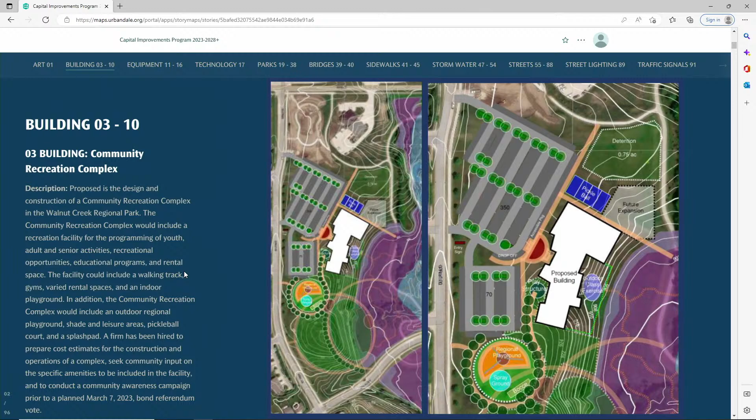This is proposed for a March 2023 bond referendum. We've been working with a number of community forums, two scientifically valid surveys, and significant community input. It's looking favorable that there's community support, but we'll know that for sure on March 7th.

But here before you tonight are the preliminary design sketches. The firm will be presenting more concrete preliminary design plans at the Park and Rec Commission meeting on December 7th, and then to the City Council on December 13th.

I certainly, if you've followed this, and I think most of you have, in regards to the need for this type of facility, the support of this type of facility, this will be going in January, where the council will make the decision in regards to the wording on the question on the bond referendum, and then we go forward with that.

Right now the funding here is estimated at $43 million, which would include indoor gyms, indoor walking track, indoor playground, indoor meeting space, as well as programming space, outdoor splash pad, outdoor playground, and outdoor pickleball and tennis. A unique facility for Urbandale, with unique amenities, and it would be located in the Walnut Creek Regional Park.

This is where the fire station is located. This is Meredith, this is 152nd. So this is the proposed location. Happy to answer any questions on that project.

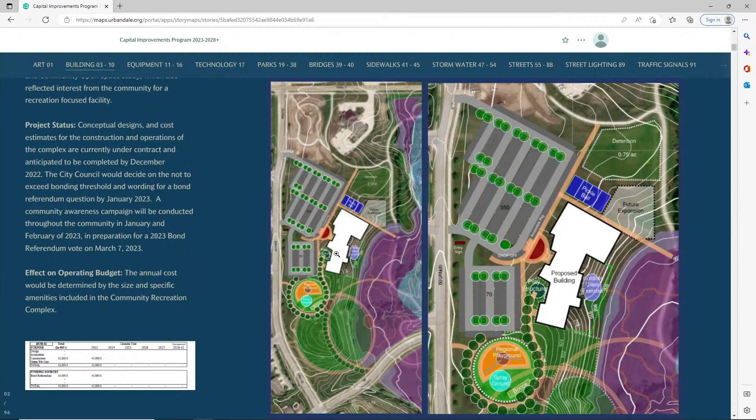Next item is upgrades to our training building that we have at 121st Street. All the items have already been purchased, we're just waiting to schedule for installation. So that's an ongoing process that should be wrapped up in the next 4 months.

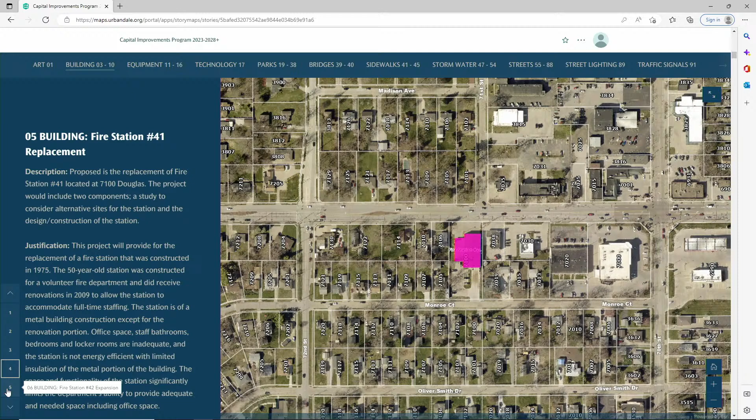Did you have a question as well, sir? No, I did not. Thank you.

Chief, one quick question. What's the lead time on the water tender truck? Is it the same 24 months? Well, right now, everything seems to be, that's the answer, it's 24 months. I know it, and then a lot of them, when they tell you it's 24 months, they come back 6 months later and tell you it's going to be 24 months from now. So it's a moving target. I really don't know what to tell you on that.

I hope not. It's a pretty simple truck. It's not as near as unique for a department because it has a tank and a way to offload the water. It doesn't have a pump associated with it, so that's why it's a cheaper cost. So I would think it would be much easier to do, but I don't know for sure.

I don't know that there's an annexation plan in place in the next whatever, but that's one of those things that could move up. And if the annexation moves quickly, then that one might have to go a little bit earlier. There is a plan, but it's all driven by the property owners. When they want to say yes, this one happens.

Any other questions? All righty, so major equipment should be changed to fire department. Yeah.

All righty, technology, Sean? So we have one item within the technology section. We have technology back for it too. Yep, perfect timing.

So basically, all our phone and data is done over the city's fiber lines. So we're trying to do redundant paths to all our facilities. We've done some other facilities, and now we're looking to do it to Fire Station 42 and Fire Station 43. We've been held up a little bit. We worked out a deal with MetroNet where they're going to put the conduits in for us, and then we would have to just finish running the fiber.

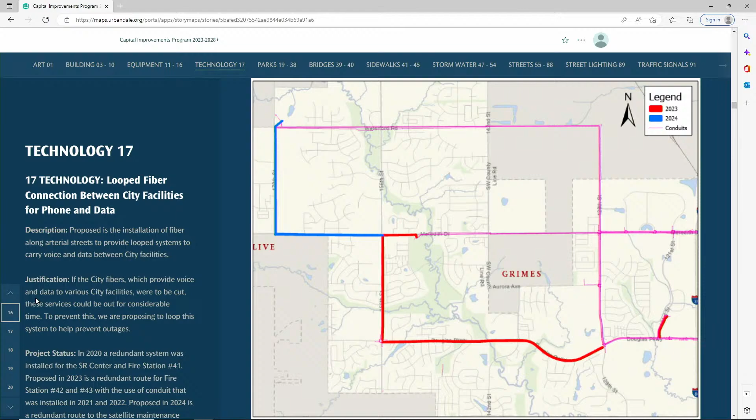All right, John, I think you get to relinquish to Jan or to Scott. Okay. Back just in time. Get John away from it so it doesn't break it again, I suppose.

I'm Scott Hoke, I'm the Assistant Director for Parks and Recreation, working with Jan on some of the projects. We have about 20 projects, so the ones that are in out years, we'll just give a mention, and then we can get in a little more detail on some that are a little more current.

The first one is an out year, which is just some connecting trails through Oakwood Open Space. The next one is a little more current, it's actually a 2-year program. It is to redo some existing trails in the Parkview Creek Trail, which is south of Meredith and east of 86th. You can kind of see Lakeview Park and Pond over here in this corner, that's Townsend right through there. So the first phase would be to redo this connection.

And then the next would be bring it all the way down here in the blue. That's again a 2-year program. Red is 2023, blue would be for 2024. This is kind of a combination - we do some trail improvements with engineering's help on the operations side, and sometimes we add these in when they're big enough to do repairs within the CIP as well, to help offset the miles and miles of trails that we do.

Quick question: when we redid the trail up north, citizens came to the council and asked why we didn't also connect into the neighborhood at the same time. I think on this trail there are some neighborhood connections off of it as well. Going forward, I assume our designs would connect out, not just the main spine? Yes, this one actually connects through the whole area. We could look at areas that are just little pieces here and there - although they weren't quite little, they were sizable connections to make sure we're doing that. But we're splitting this over 2 years to make the funding work for us.

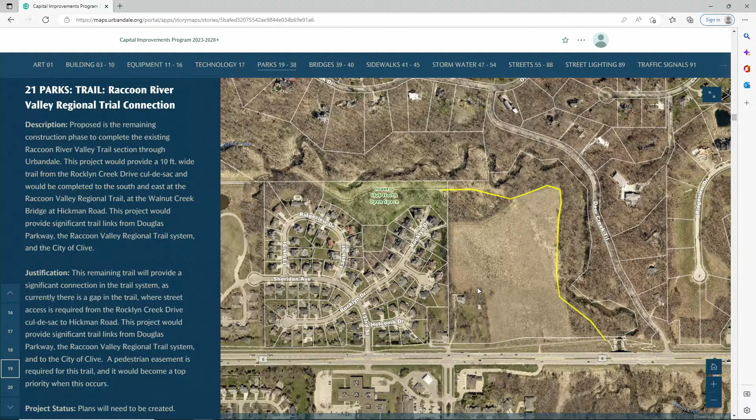Next year is also an out year, and this would be a connection as the property might become available. This is Hickman here to the south, and this would connect up into Country Club Open Space, one of our parks that connects into the larger trail system.

This is not quite an out year, but it's out there a little bit because we're waiting for some development to happen to make this Waterford Trail connection. Down here is Waterford Park and Barrett-Bozen Park. This would be the trail connection as the community starts to grow in that direction, we hope.

This one is a little closer to the time frame - some improvements into Barrett-Bozen Park. Barrett-Bozen has been extremely popular with us as our natural playscape area, getting a lot of great use. We did phase 1, which was the parking lot. There's a shelter and some play features, including a creek access, that has also been very well received.

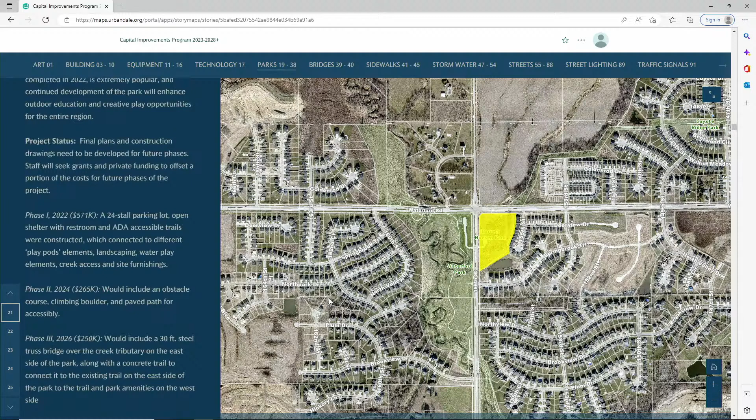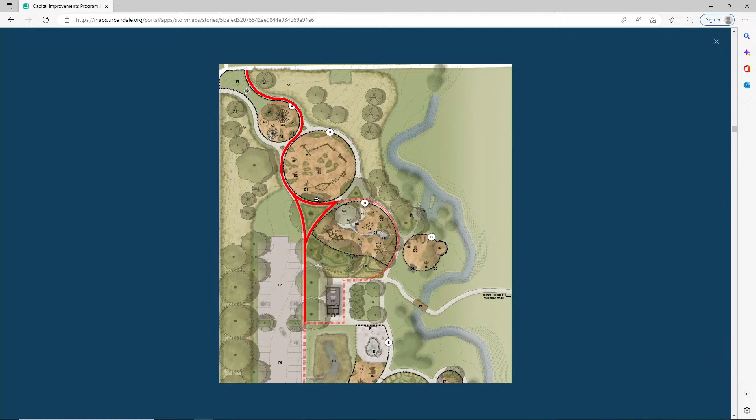So we'd be looking at in 2024 doing connections to these additional circles. This large circle right here has been completed, and the shelter down here has been completed. We'd be working our way north, getting where we could through funding. I can show you...

One of the design options is to include sort of an obstacle course as part of the park. Climbing rocks are very popular too - they look great, and they also serve a great purpose for a lot of kids for different reasons. This was just another neat feature that the people who did the original design included - literally a large bird's nest for kids to experience and feel what that's like to be in there.

This goes along with what Jan mentioned about the office re-expansion - continuing that, or doing some additional things on those pieces of property. It's a multi-year approach because they're all different projects. This is the indoor recreation office, Parks and Recreation office. The first phase would be some additional things within the building: building out a small conference room, a small community room, and this area to the south. We're not quite sure what exactly will go in there because we're waiting to see what happens with the bond referendum. Whatever we do here, we'd want to complement that facility, not compete with it.

Additional phases or projects include some outdoor components as well. This master plan has a splash pad, a lawn space - probably artificial turf - to be used for community events, outdoor yoga, and other activities. We also have in the design a little 9-hole mini golf, all to activate this space that would tie into the Memorial Tree Park. The library is down here as well.

One of the things is because with the outdoors, we do feel we'll want some outdoor restrooms that are accessible from the outside. So we'd be looking to do the building first.

Next is just kind of the next phase for Dunlap. Obviously a very popular park, a very passive park, but gets a lot of great usage. We've done some great improvements over the last couple of years. This would be into 2024 to do a memorial garden. And then in 2026, would be to add a permanent flushable restroom in that facility as well.

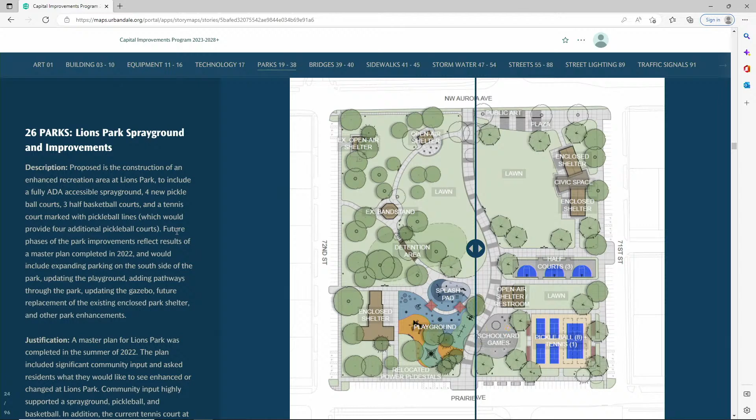This is one of my favorite slides, by the way. So this is for Lions Park improvements. We did share the Lions master plan with council a month or so ago, but this is to get going on those pieces of that.

The first phase in 2023 would be to do the splash pad. We removed the wading pool a few years ago, and the goal has been to replace that with a smaller spray park. So that would be the first one.

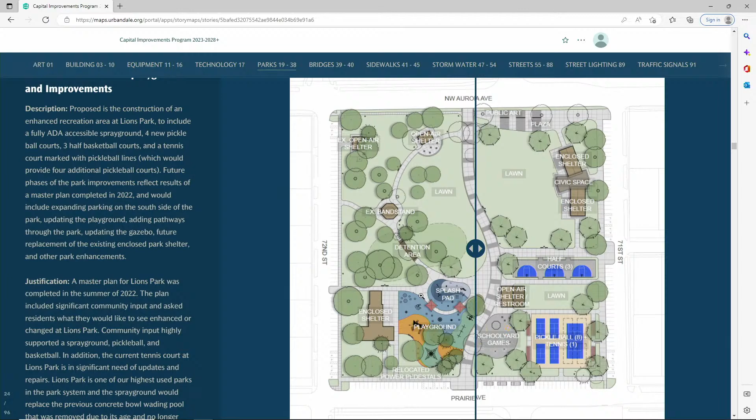The second phase, which would be in 2024, would be to do this corner over here, which would be the tennis court - redoing the tennis courts, installing some pickleball, and then also some half-court basketball courts in that location.

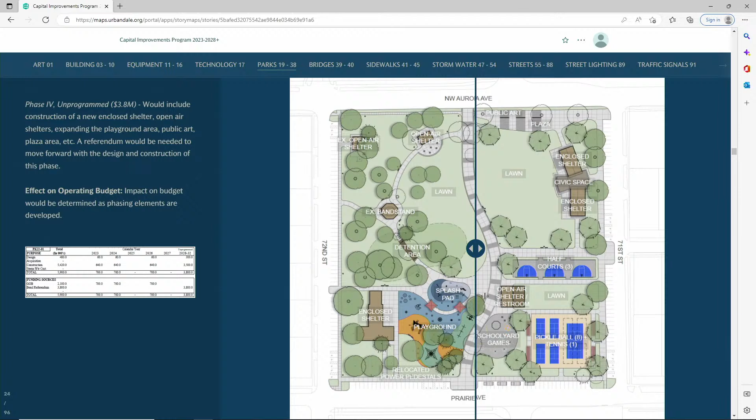And then I'm going to show you this. So here is the first phase, and then we go into the extended phase, which takes us out. Again, we don't have a time frame on the extended phase, but you can see - oh sorry, I went the wrong way. So this is the extended phase, which removes the existing shelter in the southwest corner and places it up in the northeast corner to add a lot more active lawn space.

Now we have shared with the school district that our long-term goal is to look at moving the softball field into a new location, so they know it. They know they kind of need to start looking for maybe a possible location. They have leased the facility from us, and it's just kind of a year-to-year lease that we do, which has been a great relationship. But Lions is obviously one of our more popular parks, it gets a lot of use, so the plan would be to move forward with that.

Now, this is an out year to move the shelter. And then in 2026 would be to redo a lot of the playground area and also look to improve and add some parking on the south side along Prairie Avenue here as well. So those would be the Lions improvements, kind of phased out over a few years.

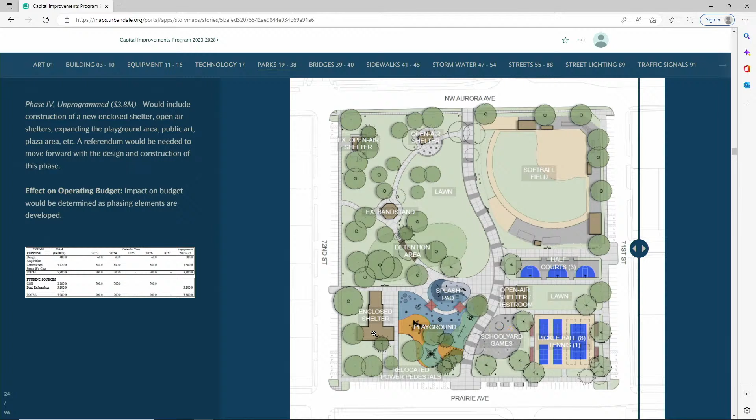I'll pause for questions, but if you don't have any, I will move on.

I heard your presentation over at the city council meeting on this subject, and I'm basically not in favor of it. Got a couple of problems with it. First of all, I'll tell you right now, I'm very much opposed to any proposal that requires moving the softball field. I just see it as unnecessary expense, irritation for the school district, and one way or another it all comes out of property taxpayers' dollars anyway. And the other thing I've got a problem about is that sidewalk. It looks great on a presentation drawing, but as somebody else observed after the council meeting, we've got plenty of concrete, we need grass. I just don't see it. And just letting you folks know, I'm pretty negative on it.

Thanks, and I can share - thank you for that comment. I can share that was talked a little bit about at the council meeting as well, the sidewalk that comes through. Now there has been some desire that we received through the public input process of kind of having an internal connection north to south a little bit. And we actually would use it as a park maintenance item, to get a truck through there to pick up the garbage and make life a little easier on the sidewalks. But exactly where it would be located, as we get into final plans in the new rendition, whether it would need to slide over, would we need this one right here?

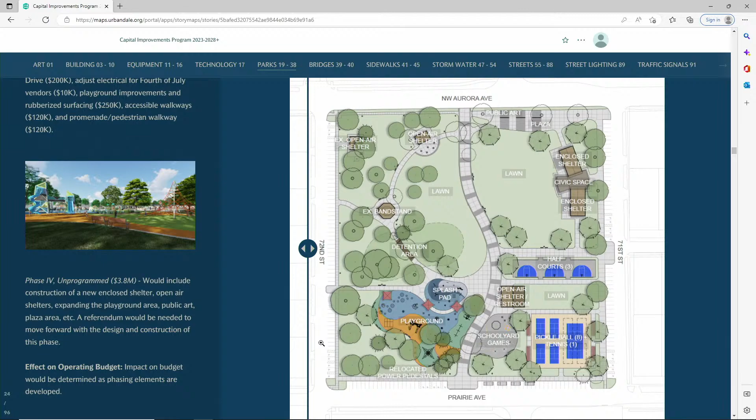The North Park corridor area is listed in 2024. Most of this funding would actually come from contributions from businesses in the area to help develop that parcel. We would just be leasing that space, so we haven't developed the lease yet. Our commitment would be some design work, some infrastructure support, and then the maintenance while it's operated as a park. This is to utilize that parcel a little better since it's sitting vacant, and some of the area corporations would be helping make sure that happens. The city's commitment dollar-wise for the capital projects is just over $11,000 in 2024.

It's a parcel owned by Delta Dental currently, correct, but they don't have expansion plans, so they're offering it for a lease for community use. It's a great project that we obviously hope continues.

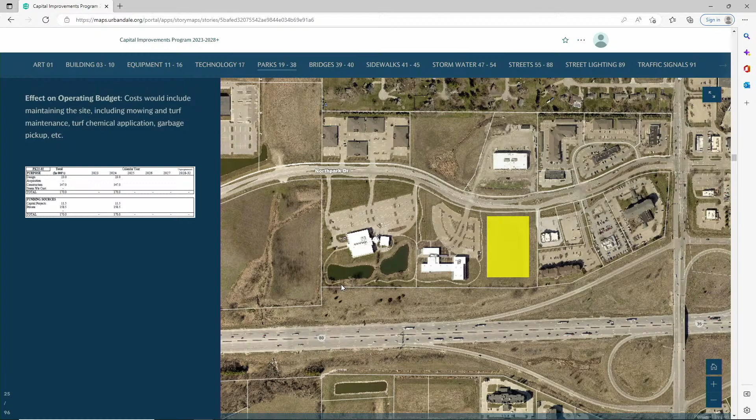Just a quick comment, it might be worthwhile when doing the fundraising around that to try and secure an endowment for the maintenance. You'd have enough private partners there to maybe pull that off.

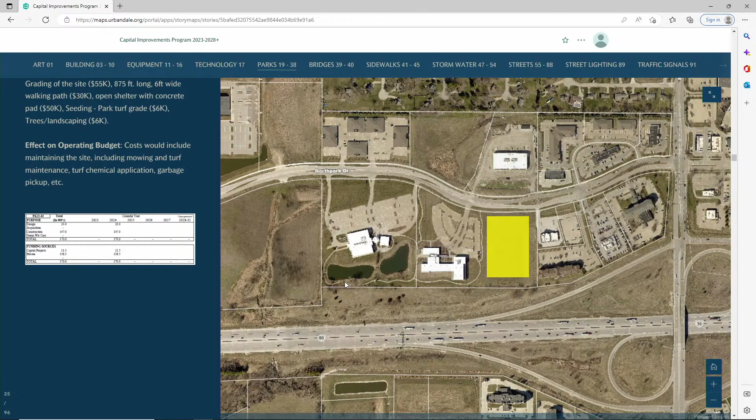The next one is a multiple year project list. You can see there are a whole bunch of colored dots on the map identifying the parks we believe need to have playgrounds replaced. These are not new additions; they are replacements. We have 37 playground structures out in the park system, and we've been replacing them through the operational funds of the city, but we are just not keeping pace.

Typically playgrounds last about 20 years, depending on usage and environmental issues. We already have 15 that are currently 16 years old, and replacing them one a year, the math doesn't work out well to get to those numbers. So our first year we'd be looking at replacing the playground structures at Murphy, Northview Estates, and Rockland Park as part of CIP dollars. Sylvan Ridge is open now, which was paid for out of operational dollars.

This lays out the map of what we'd like to do over the next few years with committee and council approval, to help us catch up on some of these smaller neighborhood park pieces of playground equipment. Next year, 2024, would be Days Run, North Karen Acres Park, and South Karen Acres Park. Out of the operational budget, we'd be looking at pour-and-play surface under the swings and slides at Walker Johnston. You can see we have that spread out for a few different parks every year.

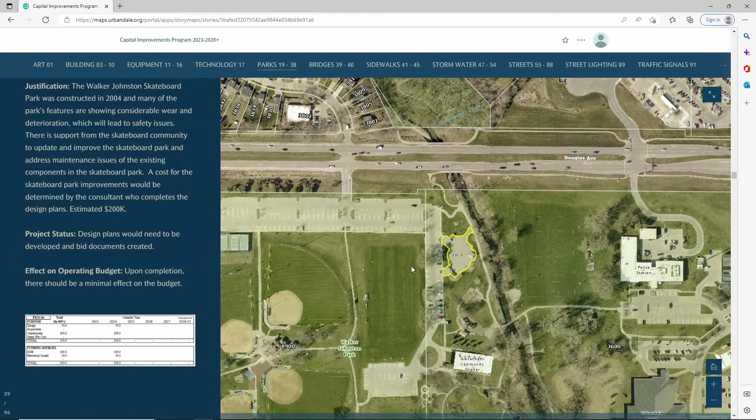Right, and just as a point of reference, we're seeing a younger crowd. I think a lot of the older skaters might go down to the larger one, but the younger, smarter people know to stay in Urbandale and be on ours.

Let me try this. This is for some improvements at Walker Johnston Park, and this is in 2027, so it's a few years out. Last year, we replaced a lot of the internal fencing along the baselines. This would be to replace some of the 10-foot outfield fencing as well. Then in a future year, make some other improvements to the facility, whether it's improvements in the lighting and improvements in the playing field, in an out year.

So I guess on this, with the lighting improvement piece, going to the LEDs, I'm guessing is an operational cost savings. We've kind of programmed this out. Is there a time to just do it earlier for the operational cost savings, or is equipment not available with the lighting piece?

Some of this is dealing with the timing of when we need to replace our current fixtures, and not pull them out too soon before the end of their life. It is coming down in pricing as well, so the cost savings—or at least it was, I don't know if recently it's gone back up, I haven't priced it for a little while. But making sure that, again, we don't want to pull them out too early, and there's still some needs for other things in there too. So we always have to balance that on where we are with capital improvement projects.

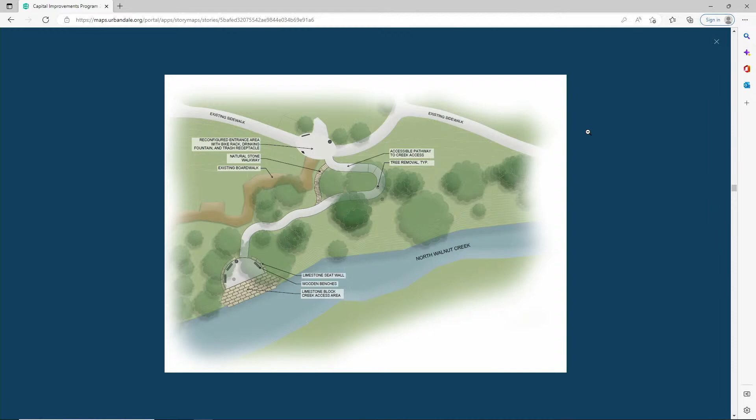This would be to expand our current 13-hole disc golf course to an 18-hole disc golf course, a little more traditional in its length, which would help for hosting small tournaments and that sort of thing. We also have planned in 2024, through the shelters, a small open-air shelter there as well, as kind of a starting point for people participating in those activities.

So just with this one, since we do have the U.S. champion—is that his title?—is there any private fundraising opportunities with this to enhance what we're already looking to do, whether it's better tee pads or signage along the way, things like that? There are a lot of items with disc golf that can make the round a little better, just some additional enhancements. Yeah, that's something we can definitely have discussions about and see what's available out there, either through grants or private fundraising with that market.

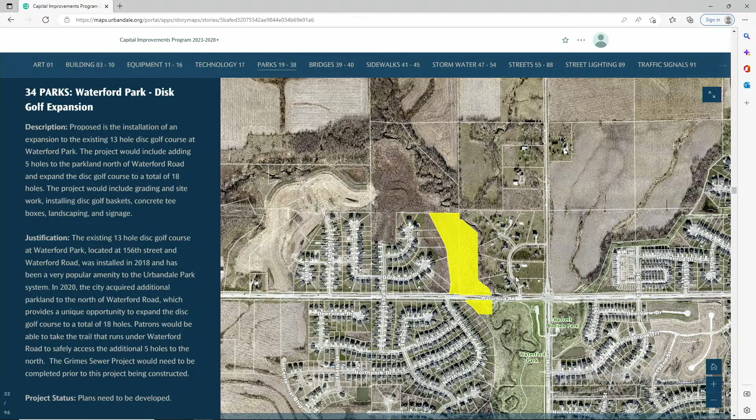Somebody might have connections to like Prodigy Discs or something. Right, just might happen to have. Yeah, it's his own course. It is, and I'm not sure what he designs, I want to play it.

Yeah, I'm more of a par 3 disc golf course kind of person. Yeah, Interstate Battery is great for that.

So this is a Park Road connection. This is the Walnut Creek Regional Park, and here is the new large shelter. This would continue the road all the way down to Douglas. Part of the finalization and priority of this is based on the development in that little area and how that proceeds and moves forward. So that's in Curtis's court, not mine. So yeah, that's listed a couple years out, again based on the development around Douglas Avenue.

This is also an out year, but the master plan for the regional park always included an enclosed shelter slash nature center. So this is in there as an out year as well, and no location has really been identified.

This is the regional playground, which aligns with the new recreation complex that we are looking to do, but it's listed as a separate item. We are extremely optimistic on the goals of the new recreation complex, so we would never question that, but we do want to have an option for some playground out in that area as well. So, with or without, that would be something we want to continue forward with. So it's not redundant—it would be in addition to the bond referendum item? Correct.

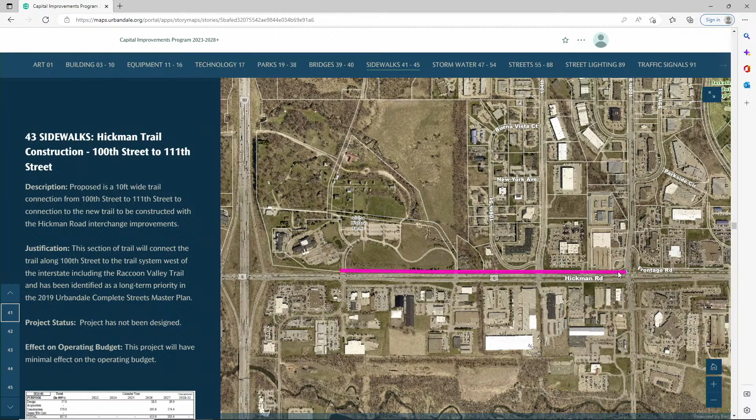This next slide is our sidewalks at various locations. A lot of this is to construct sidewalks during our arterial projects, with funding included in the arterial sidewalks budget. It used to be more for connecting gaps, but we've filled in most gaps in our sidewalk network now. We also on occasion add bond funding if we need to fix more city sidewalks as part of our sidewalk program. We kind of keep a balance there, and as that gets down, we bond for more money to keep repairing the sidewalks that are our responsibility.

On page 45, this is the 114th Street sidewalk construction project between Douglas Avenue and Meredith Drive. We've looked at it and talked to the property owners, the majority of whom is R&R Realty. With this Aurora Business Park, having sidewalks helps them retain clients and promote getting new businesses in by making the business park walkable. This was done back when they just didn't build sidewalks in business parks, so it's kind of a joint venture where we pay for half the sidewalk and they pay for the other half.

Based on their timing, it's a 3-year program. In the first year, 2024, we'd make sure we had a connection from Aurora up to Meredith Drive on the west side of 114th. Then in 2025, we'd continue down to Douglas, and come back in 2026 to get one along Aurora that would connect with the pond and the walkway around it.

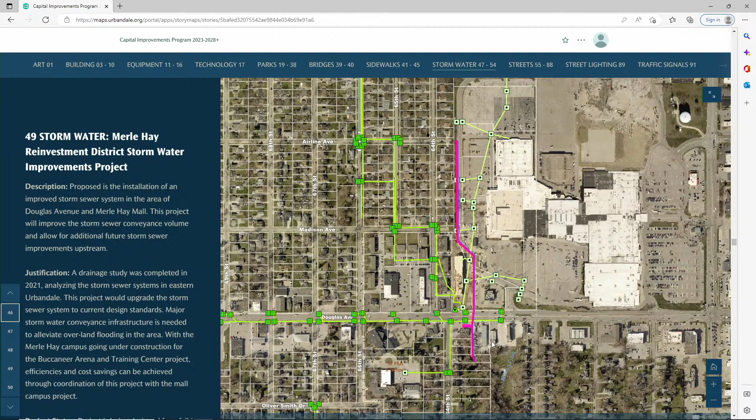On page 50 is some improvements on Oliver Smith over to 72nd, just east of the Karen Acres School, but that is in an out year.

On page 51 there's the removal of a couple old roadway culverts from back when 100th Street used to come through up to the interstate. Now we have Meredith here and our 104th, Sutton, up to 100th Street is where it got rerouted, so there are two old culverts there.

It appears the property owner on the north side would like theirs to stay - if it gets removed, it would cut off how they access their property at the north end, and that one's in a lot better shape. The one on the south end is in the park and is starting to collapse, so we're putting a design together to remove that and open the channel back up. That's planned to be bid out this winter, possibly with some construction done yet this winter.

If the one on the north is not going to be done, is that reflected in the cost? It is not - right now that's the cost to do both. But the property owner appears to not want us to do it, and we do not have an easement or right to be there, so we could not do it.

Is there a house somewhere in here? Yeah, there's a house down here. So this property owner owns all of this, while this one down here is in a park, and we have an easement to access it.

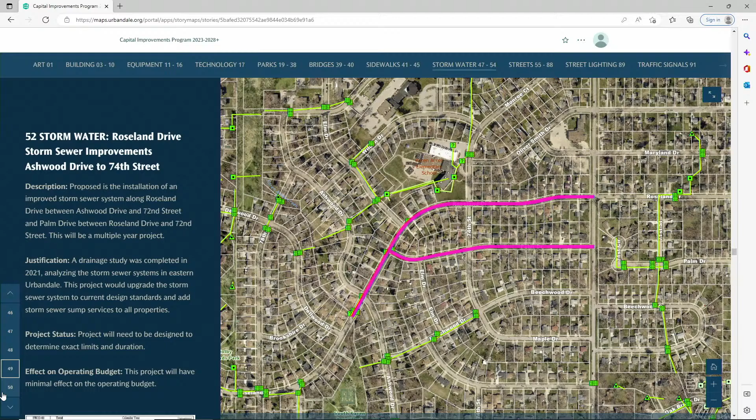And then this is one I'd made reference to before. That's a new project: making the connections here to the storm sewer going in by the mall by doing the area in pink here, and tying in the storm system.

What's kind of nice is before this, all our storm sewer to the north keeps running through these same pipes all the way down here. Once we make this connection over the larger pipe, it takes this flow in this area off of the area down here, which helps things out.

And then we've got another small piece that we can add in here, which again takes this flow over to here and more flow off of what's happening in the rest of the neighborhood. So by moving some of the flows to the east, we actually help with the flooding in the neighborhoods.

And this also gives us the ability in the future, as you can see, there's no storm sewer in this area. So that gives us the ability to take this and expand it to the west, provide storm sewer and also some services to the properties along here. So this one right now, we've got planned in 2027.

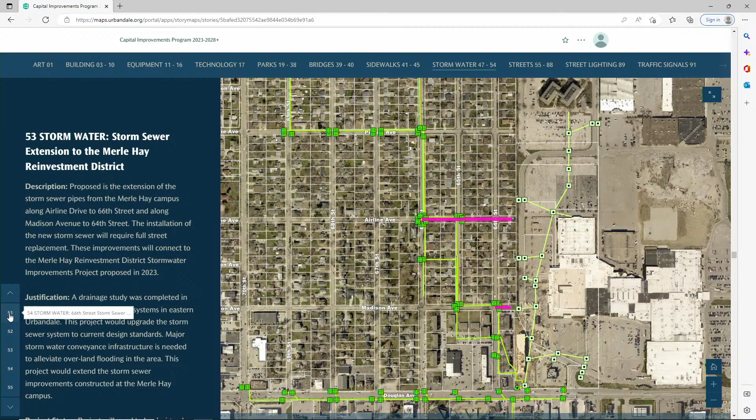So this is just like the other ones. As we get into the design, we'll kind of fine tune exactly where the work's gonna be, what streets are replaced, and where we do the storm sewer.

This may be such that, again, we may have to do some work along Meredith, we'll determine that, or there might be some ways to run some different sump services on other side streets. We'll know that more once we truly get into design and can look at all the elevations and all potential conflicts that we have with water and sanitary.

Okay. Comment here. Okay.

As you folks know, I've been a strong advocate of storm sewer improvements. And, discussed here again tonight, we had a high-level study a few years ago, and I think we identified at that time $90+ million worth of projects. And a lot of Urbandale, east of 86th Street, just like we've been talking here tonight, doesn't have any storm sewers.

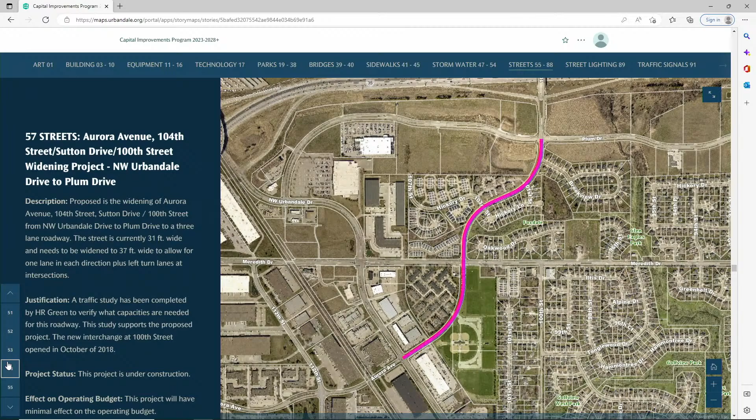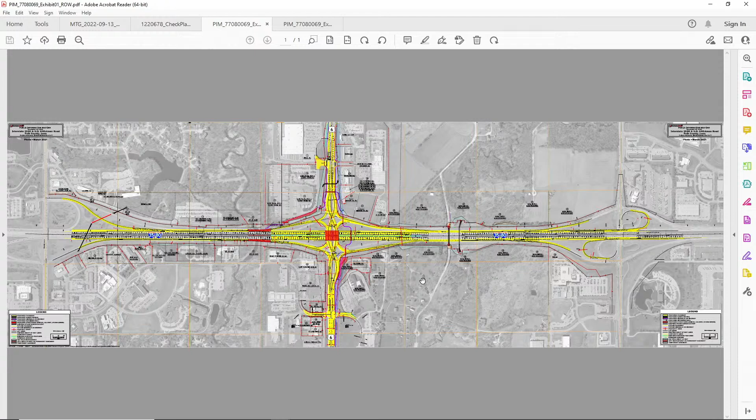And if we look a little closer... oops, let me zoom in a little bit more.

A look at what's proposed at Hickman is a diverging diamond. The way that works is, say you're going eastbound and want to go north. Today you'd come through the intersection and turn left in front of traffic to go north. Here, you'll come through a signalized intersection, cross to the other side of the road, and have a ramp to go north. If you're going straight, you come back through a signalized intersection and end up back on the correct side of the road. The benefit is you don't take left turns in front of oncoming traffic. There's currently one of these in Ankeny and one in Waukee.

Also want to note that with another project on a future page, we're constructing a trail on the north side of Hickman that'll come to the entrance of Lifetime Fitness. With this project, it'll pick up that trail, bring it across, go up and over the ramps, under the interstate, back up over the ramps, and continue over to east of 111th Street. There'll also be an underpass at Hickman that comes down by the truck stop and connects to Clive's Greenbelt Trail.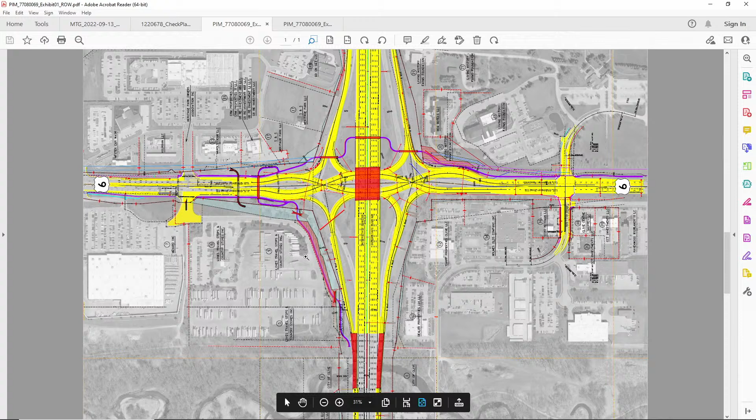So just to show you some of the other big parts going on with this. Since this is an interchange where we have a chance to make an impact, Clive and Urbandale are really working on the aesthetics - different things we can do to make this a signature interchange. Here on the north is the trail coming through, but normally you'd just have standard grass medians out there. We're looking at ways to do stormwater detention, add nicer grasses than just a standard cut lawn look, and some different monuments.

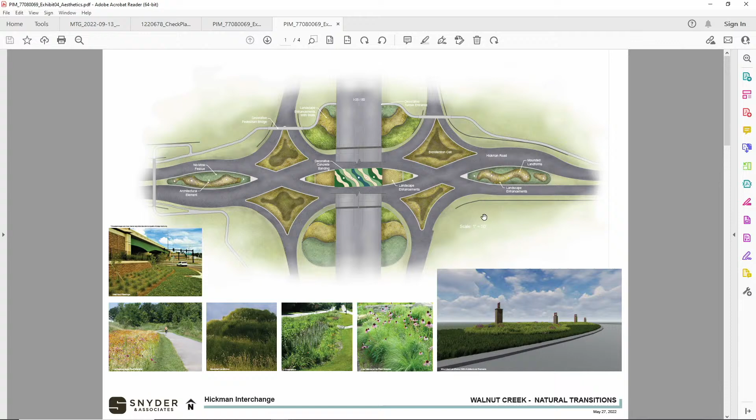This is just our conceptual area. We're getting ready to go into the actual final design once we get a contract approved with a consultant. Here's another look at some different features that could be included on the MSE walls - doing a pattern and some different stone type work monuments.

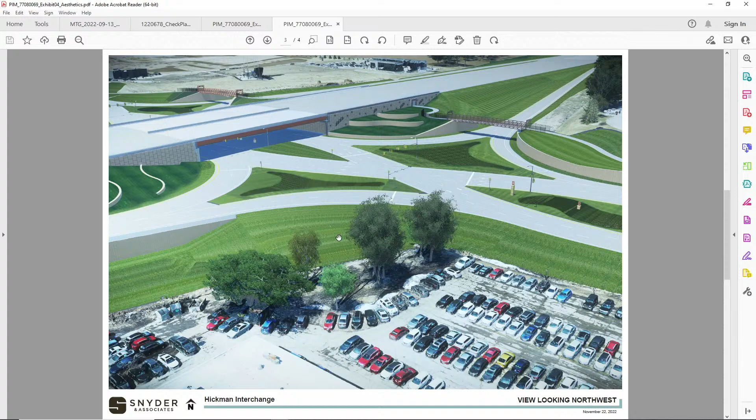And here's a rendering - this is the east side, looking northwest. This shows how the trail will come along. It'll be up high, go over the ramps, come down, go under the interstate, come around, go up over the ramps, come down, and tie back in by Lifetime's entrance. This one gives a different look, to the northeast, showing how the diverging diamond works through the intersection and interchange.

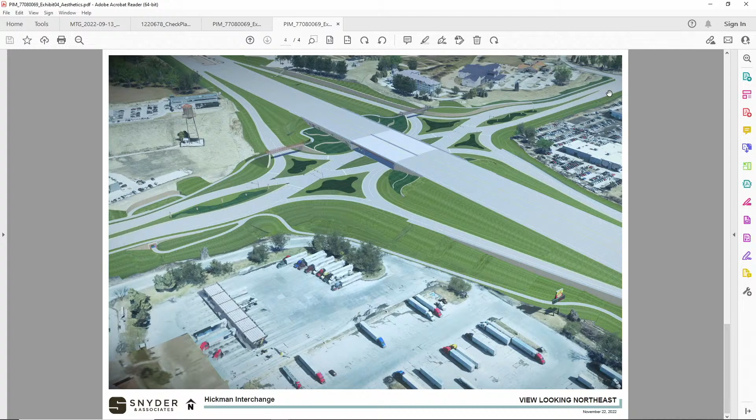Question - tell me again, how much is this bike trail going to cost in this interchange?

The total amount for Clive and Urbandale that has to do with all the aesthetics, the bike lane or trail and everything is roughly 8 million dollars. We also have a consultant hired to help us pursue several different grants, so we're assuming that amount will come down quite a bit. The bulk of this - the 60-70 million that goes into the interchange - is the DOT. The enhancements would be the two cities.

Okay, so now I'm understanding - I hear 8 million here, is that a correct statement? Correct, 8 million is what the preliminary estimate is.

It just doesn't seem to me that taxpayers are getting their money's worth out of it. I've spoken about this before, but I still don't see it. Thanks.

And then the trail project from 100th to 111th, which connects into this - that would be done before this opens, timing wise? That's why it's still not completely programmed out within the DOT, which parts of the project happen in what years. That's why I put it in '27 - it should be towards the end of the project. I think the aesthetics could be '27, could be '28. Just want to make sure we get it coordinated. So that's why I put '27, trying to hit about the same time the trail was being built with the interchange.

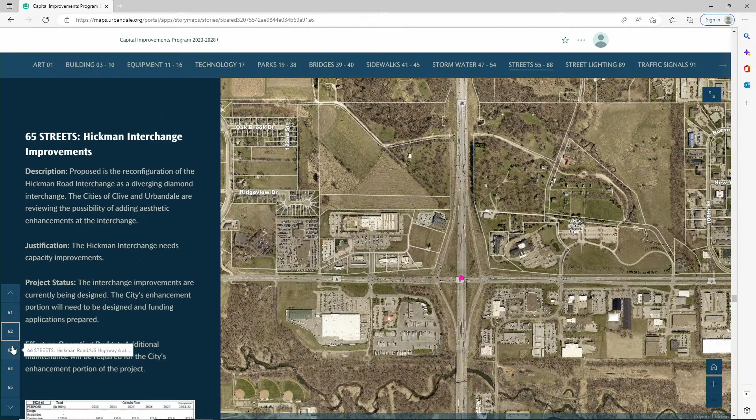And mentioning that trail - if we look at page 66, this is the Hickman Road, US Highway 6 at 128th Street intersection improvements. This project, due to utilities, has been under construction for the last 2 years with not a lot of work getting done. When it's done, there'll be dual lefts in all directions at the intersection and single right turn lanes added. The best part for Urbandale on this one is that it was a joint DOT, Clive, Urbandale project - since we were picking up most of this project, they were picking up the interchange.

With this, we're looking to get a 10-foot trail built from Deer Creek Trail that will continue east over to the Lifetime Fitness, which in turn will connect through the interchange and also connects back to the west to the Raccoon Valley Trail. So it'll make a really good trail connection there for us.

This one, typically once it's bid and everything, it would no longer be in here, but with the DOT, you don't reimburse them your share until the project's done. So once it's done, then we'll pay them.

On page 67 is the Justin Drive Preservation Project, 100th Street to 109th Street, the area in pink showing here. That will be a patch and overlay project that we have scheduled. It's split in 24-25 for funding, but we're anticipating that'll be in 2025.

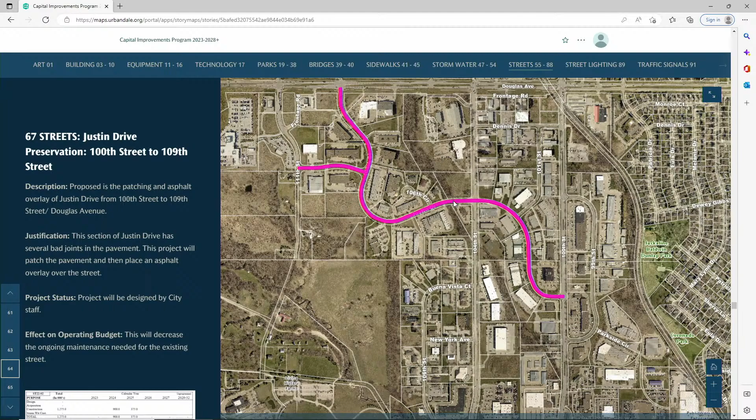And then page 68 is the medians that Jan's going to speak to you about. This project involves some public art, something I'll cover. It's been a desire from the council and the community that we introduce public art into some of the medians, and I think overall, hitting the key medians at key intersections is the goal.

The purpose tonight is the concept and to get approval for the funding. Right now, we're proposing $150,000 per year for the upcoming years. The actual design, the Public Art Committee has been put to task to come up with some design ideas. We have some preliminary design ideas, certainly not something the CIP committee needs to decide on tonight.

Here are some preliminary design ideas, kind of a ribbon type concept, with landscaping around it. Here would be a side view.

And also one of the other potentials, this type of lighted column, is part of the Douglas Avenue beautification project that's happening from Walnut Creek, so Walker Johnson Park going west. This is one of the components incorporated into that.

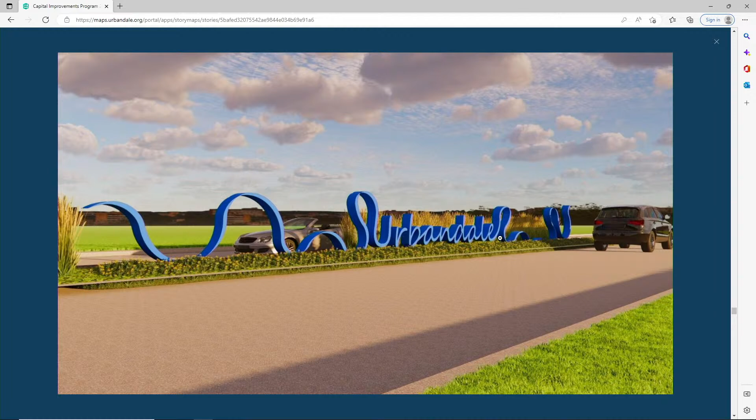So as we look at different concepts, again, not necessarily something the CIP committee needs to decide on tonight, but if it's a repeatable theme we want to be doing, there could be different concepts—different colors or character counts, or it could be just a ribbon, not necessarily with Urbandale in it. The costs certainly depend on what medians, the size of medians, how long or how big the public art would be, and what type of landscaping would be incorporated. So I can certainly answer any questions you might have.

Okay, our next one is the Meredith Drive Preservation Project, 86th Street to 104th Street. With this project, we'll be looking to do patching and overlay, and then also on the north side of the road, remove the sidewalk and construct a 10-foot trail. This did receive $500,000 in surface transportation block grant funding and is scheduled for 2025.

And then just to the west of that segment, on the next page, is Meredith Drive from 104th Street to 121st Street. With this one, we'd be looking at from 104th over to the 114th Street area for a patch and overlay, and then just patching over to 121st Street. With this project, we'll also look to continue that 10-foot trail from 104th over to Northwest Urbandale Drive, which connects to the trail to the west of Northwest Urbandale Drive.

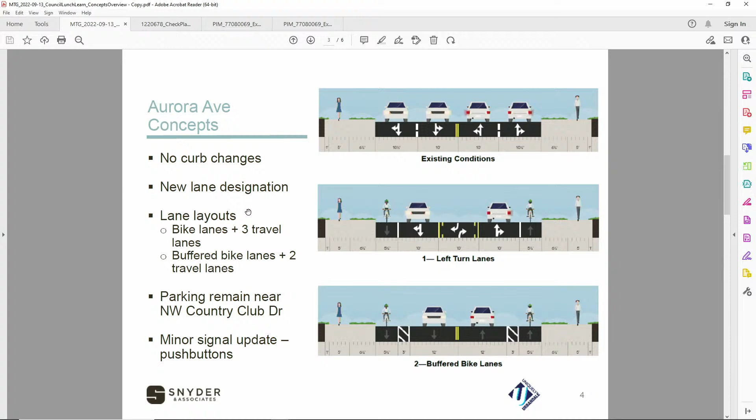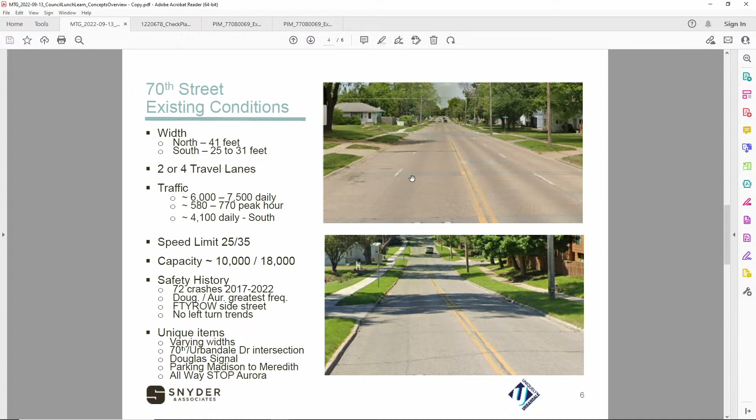One of the recommendations is we'd like to change the north part to 25 as well through the corridor, and then just kind of explain what's happening.

So when we look at the area from Hickman Road up to Urbandale Avenue today, in the 25-foot section, we've got roughly 12.5-foot lanes, 2 lanes. That's not wide enough to designate a certain area for the bicycles, so we would look at using sharrows and basically tell people to share the lane through there.

And then on our little bit wider spot where we get up to the 31-foot back-to-back, which currently is 2 lanes, we'd still have 2 lanes. We would just narrow them up to 10 foot and then add bicycle lanes to the outside.

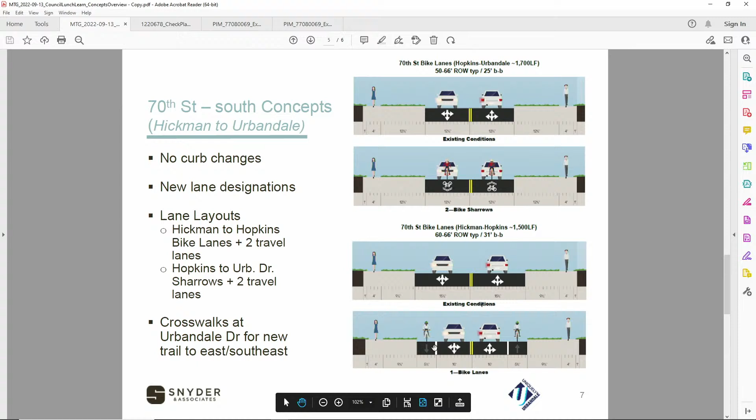The area further to the north where there are 4 lanes today, we would look at a 3-lane section, which would be at the intersections with Douglas, with Aurora, and with Meredith. We would have a 10-foot two-way left turn lane, a 10-foot lane in each direction, and then a 5-foot bike lane on each side.

And where we were not in an area that had the 3-lane configuration, we'd be able to have 2 12-foot lanes, a 3-foot painted buffer, and then, of course, the bike lane to the outside of that.

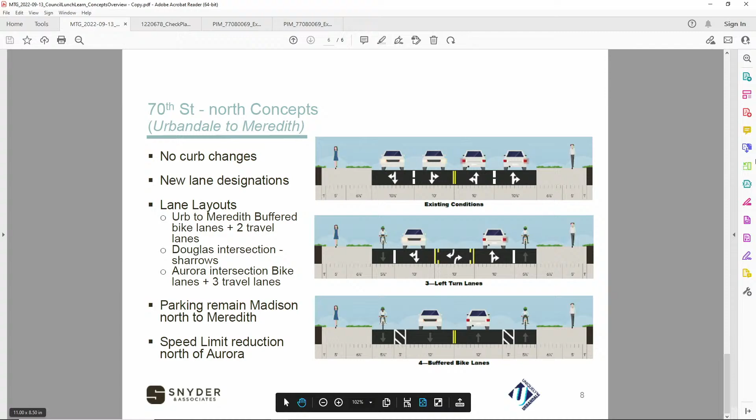I just have to comment that there are challenges with sharrows in that unless they're everywhere, then people only think it applies when they're on those particular streets. I'm sure you're aware of that.

It's a challenge. Yeah, that's what we looked at, but there really was no way to widen any of this section either. But maybe don't bother with the sharrows.

Just a question too on, sure, is there street parking? There currently is street parking on 70th.

Correct, so that would remain. Basically, if somebody was parked there and you're on your bike, you would just have to merge into the lane, go around them and come back. There's not typically a lot of parking there, but there is the occasional parking.

So yep, we would work around that and maintain that parking. But it's only parking on the 4-lane sections, right? Not on the 2-lane. Correct.

Yeah, correct. And both this and Aurora kind of have a final design piece. When does that get done? Whether is it council that'll finally approve the design piece?

Basically, I think we would go through, once the CIP is adopted, then we would look to bring the plans to go out to bid. So I'm looking at the January timeframe, whether it's the same night as the CIP or 2 weeks later, somewhere in that timeframe.

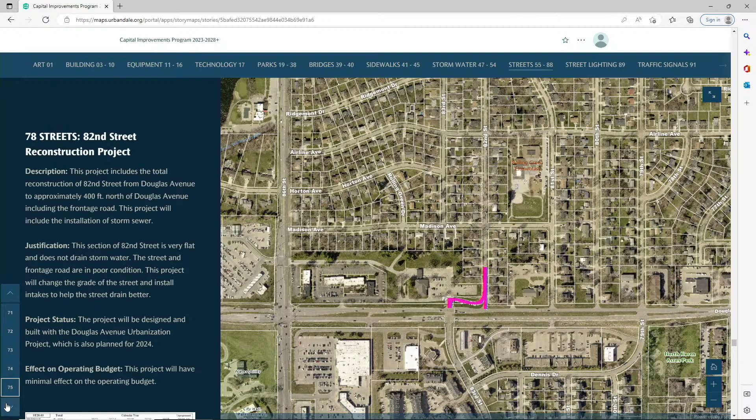Page 79 is the reconstruction of 111th Street paving south of Justin Drive, just east of the interstate. This one's in an out year, and it will be based on development. When development starts occurring in this area, we'll be ready to construct the street, and then we could move it up as necessary.

Page 80 is another one of our preservation projects. It's on 121st Street between Douglas Avenue and Meredith Drive. This would be a patching project through this area in 2024.

On page 81 is the 128th Street preservation project. This is another one of the projects that is completed, where we've done the full reconstruction and patching that was required. It just happened to be one that the bids came in a little over what we'd anticipated, so we included the page here again for a little additional funding. The contractor has a little bit of irrigation restoration work to complete, but for the most part, the project is done.

And then page 82 is 142nd Street, a connection from Douglas up to Meredith. This is the reconstruction for it, and it is in an out year.